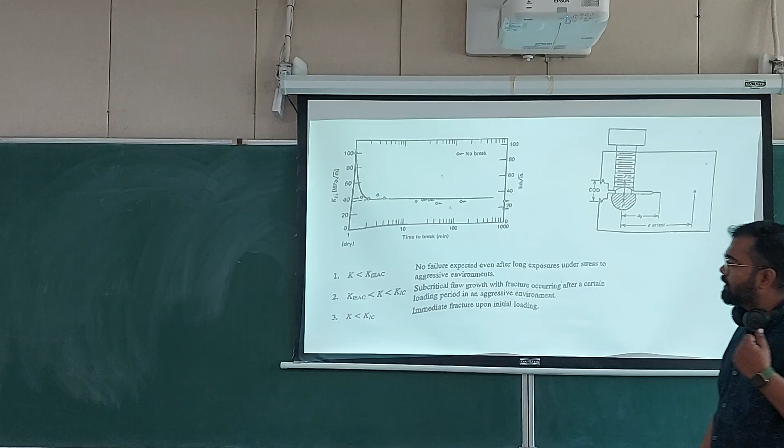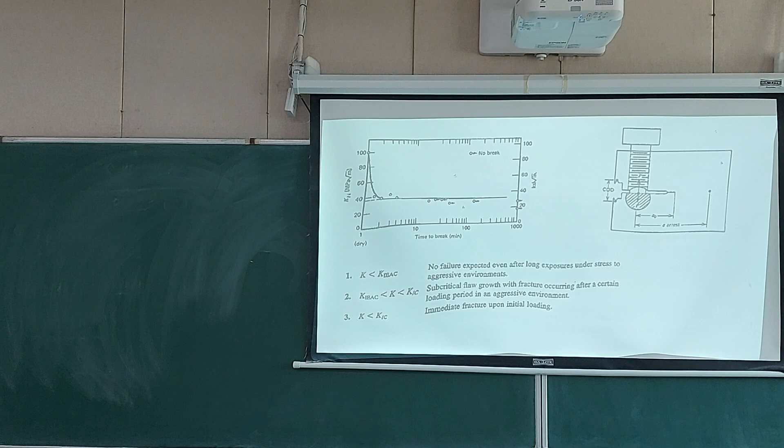In the last class, when we were discussing the effect of corrosive media on fracture toughness, the plot you see on the left hand side comes from multi-specimen testing. So you load a lot of specimens, and this is a normal fracture toughness test. You take your specimen, put it in corrosive media, and then you let it be there as long as it breaks. So catastrophic failure happens, and you plot that.

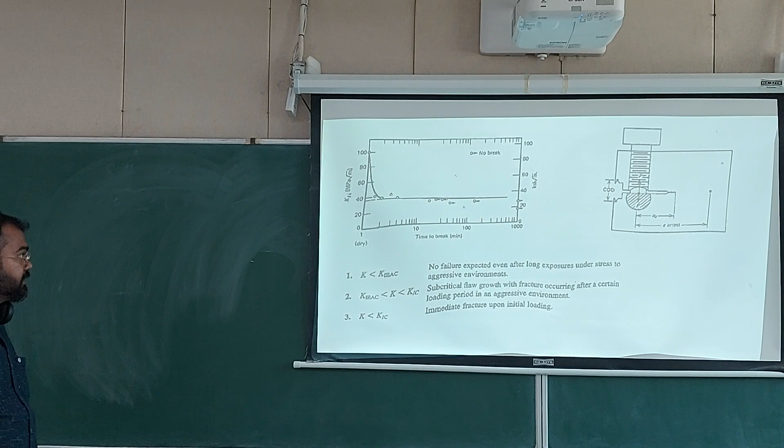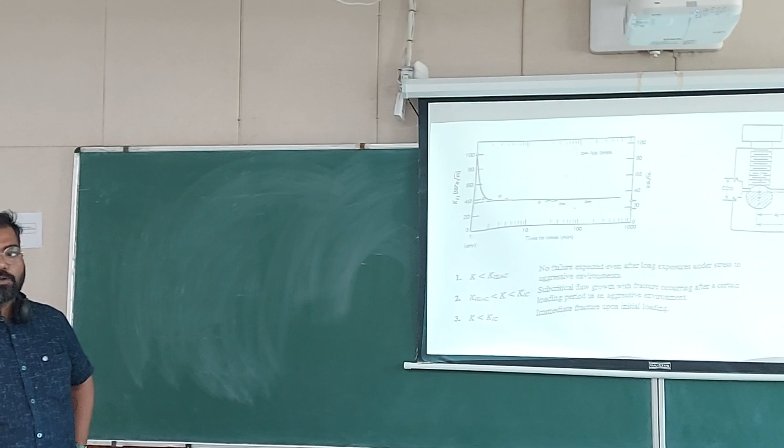So with increase in time, the fracture toughness appears to be decreasing, and there is a value below which, if you put it for a very large amount of time, even then there will be no failure. So it is similar to what you saw in fatigue, endurance.

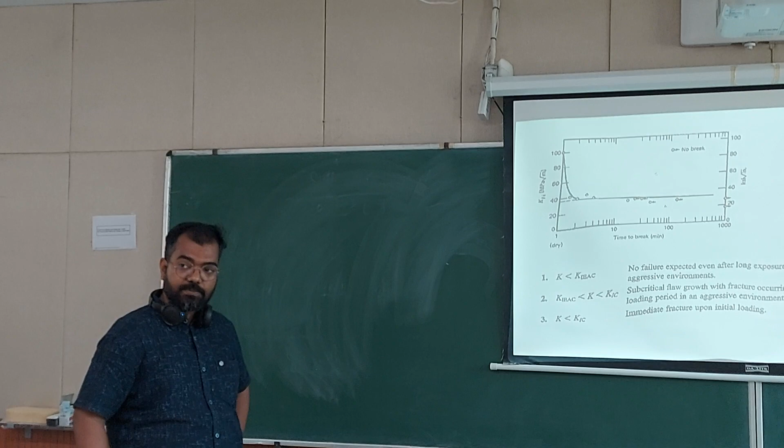And then we also discussed the modified CT specimen, and we have also seen a video of this kind of CT specimen which was used in a fixture, and you can do all the instrumentation with this. So you can put a COD gauge where you see the COD knife edges, and take the wires out and seal the wire so that it is not affected by the corrosive media.

But then there is a problem that the corrosive media should not affect the loading screw which is there. So you have to make a material which has a protective coating, or a material which does not show corrosion to the media where you are planning to put your specimen.

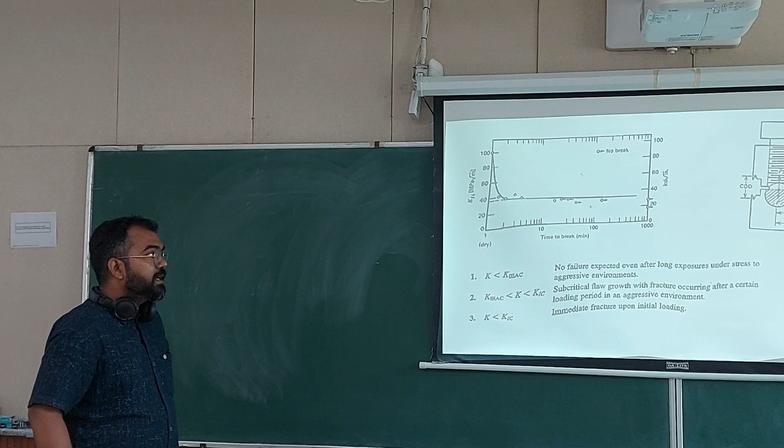And with one specimen of this kind, you can find out the threshold value of K1C, which is K1 EAC or K1 SCC, stress corrosion cracking or environmental assisted cracking. Environmental assisted cracking is a vague term because environment can also include temperature. But we are not talking about that because those things are a separate field, and we know what happens when you change the temperature.

And because there are chemical reactions involved in corrosion, you will have the effect of free energy and the effect of Le Chatelier's principle. So changing temperature or pressure will change the reaction rate, and that will change the rate of crack growth.

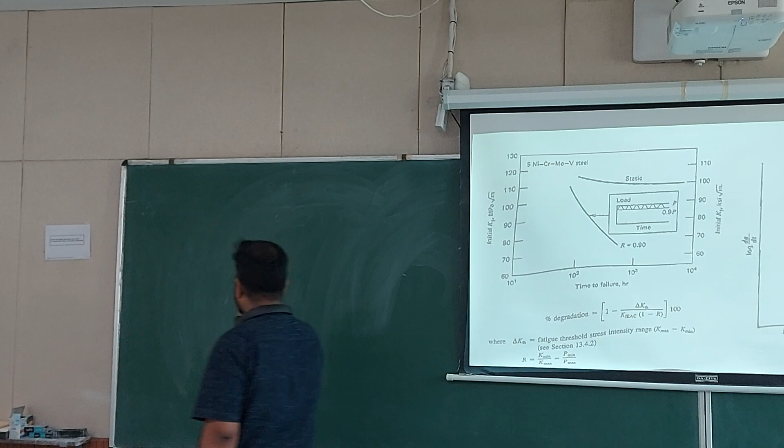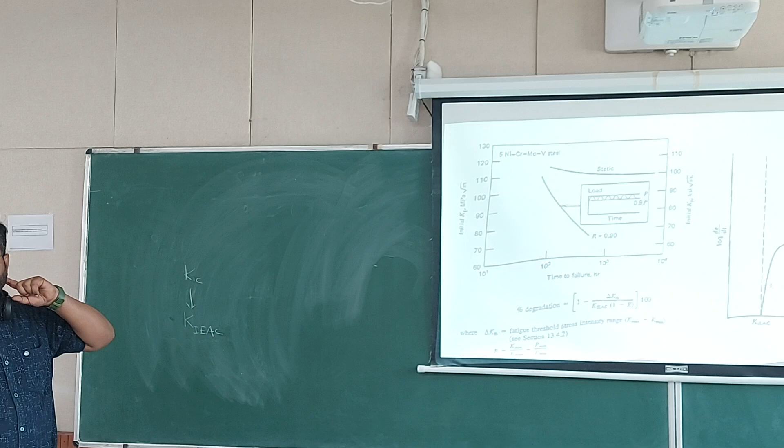Then what we have studied in the previous slide is that from K1C the value degrades to a lower value which is K1 EAC. Between these two values the material can show stable crack growth. Once it reaches K1C, it will show catastrophic failure, and once it is beyond the threshold value of EAC, it will be stably growing. So that's the plot on the right hand side, and it's not semi-log, it's a double log plot. So crack growth velocity versus K.

So for a certain value of K there will be no crack growth. Then the velocity will increase, then it will become stable, and then it will become unstable. This kind of graph we have seen before in fatigue: da/dN versus, what was that plot? Delta K. In this case it is K, and we have also seen a similar graph in creep where this graph will be shifted to the origin, and it will start with a positive value. On the y-axis you will have strain, on the x-axis you will have time.

On the left hand side what you see is the effect of cyclic loading on it. So the scenario can be further complicated. It can be creep, creep fatigue, environmental assisted cracking in presence of cyclic loading. You can further complicate it by putting it at high temperature. So a very small amplitude of loading has been applied on the curve which has a steeper slope, which is lower than the static curve. The maximum load is P and the minimum load is 0.9 P. So R is 0.9 in this case, and you see that there is a drastic change in the K versus time to failure plot.

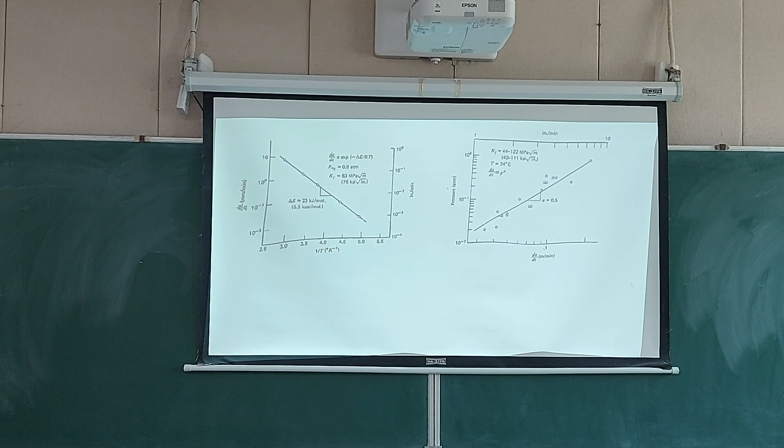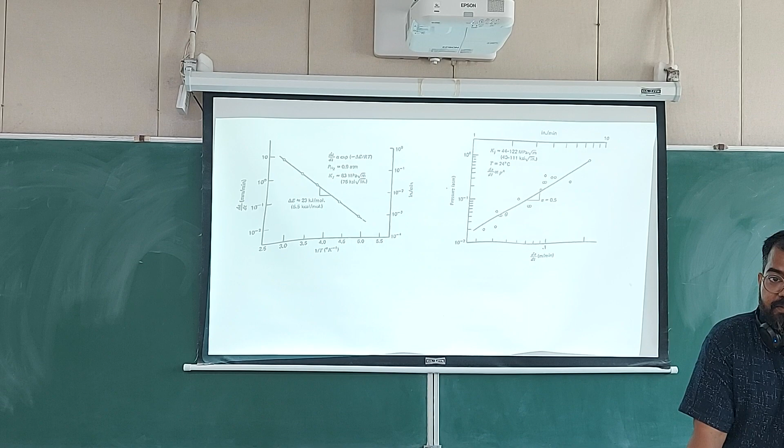Okay, done. Yeah, so the syllabus is over. And I will introduce one more thing which is not related to the syllabus. It is just for thinking. It is out there in media and on YouTube, and there is a lot of information about this, but I don't know how many of us think about it. So I'll just talk a little bit about that, even though I don't understand this completely.

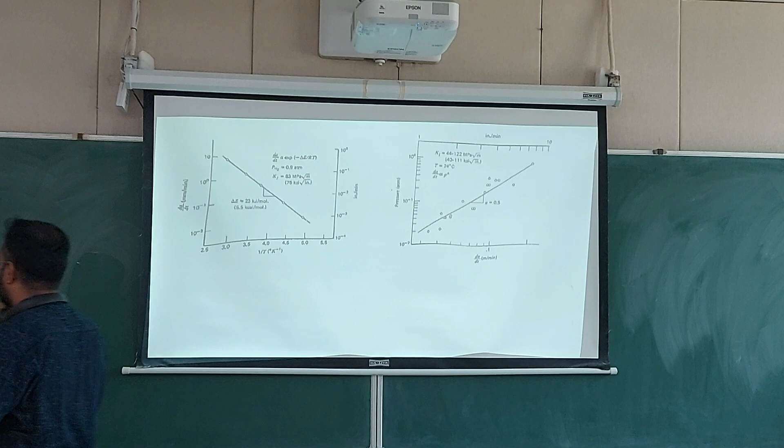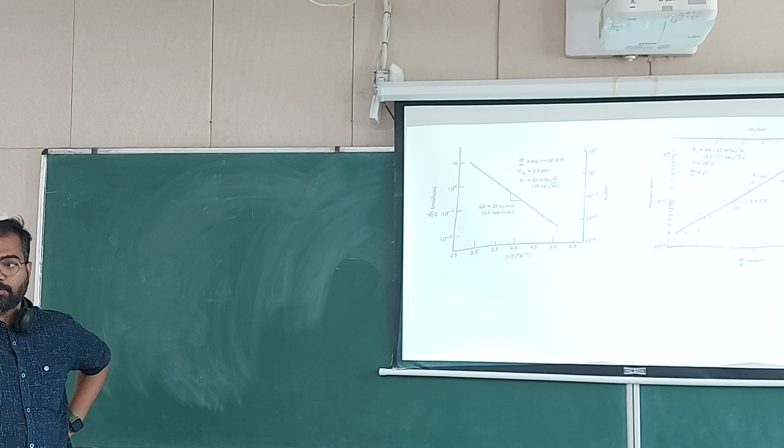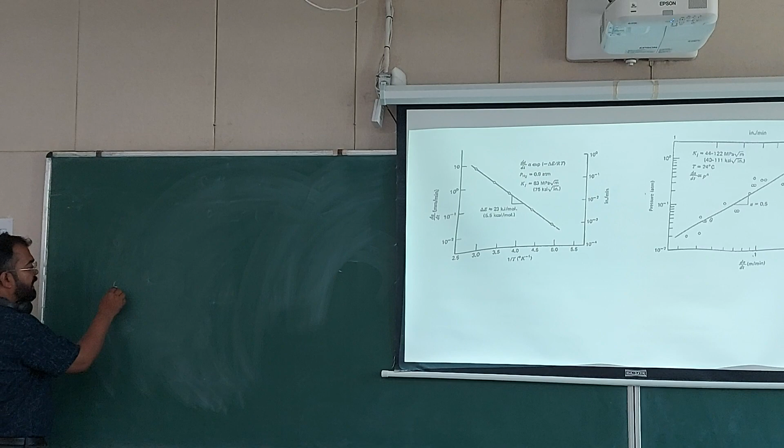So there is a case of, these kinds of things have been applied in various regimes, but one case which I can talk about is the case of population. It can be the population of humans or animals or insects. So if you take two animals and then let them reproduce, rabbit multiplies